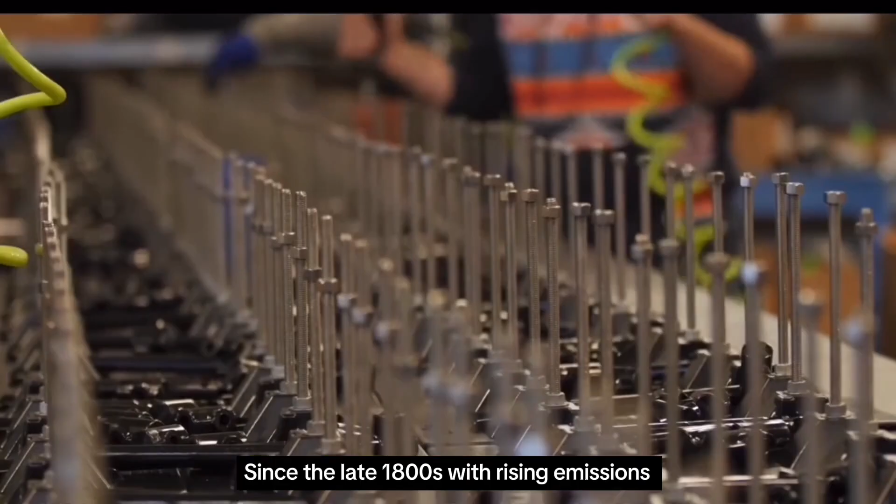To cap global warming at 1.5 degrees Celsius as per the Paris Agreement, we must cut emissions by 45% by 2030 and achieve net zero by 2050 by shifting to renewable energy like wind and solar. But consider this. What if these renewable sources, as I mentioned lately, also include noises?

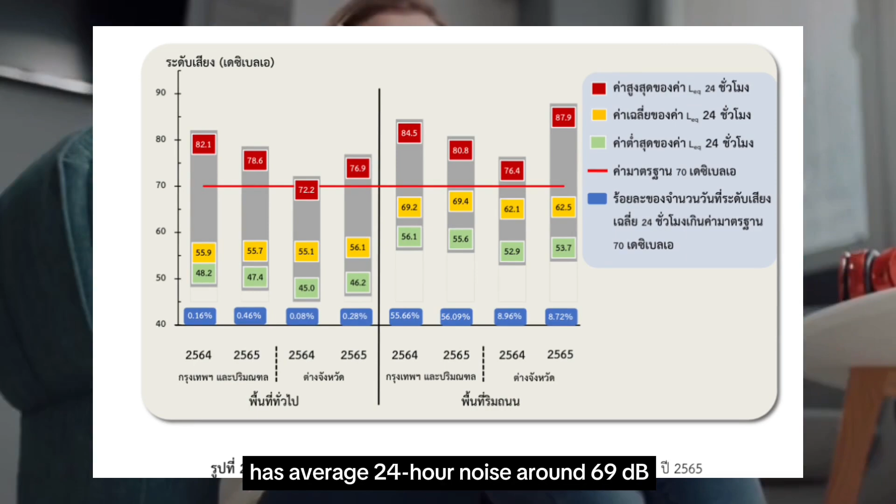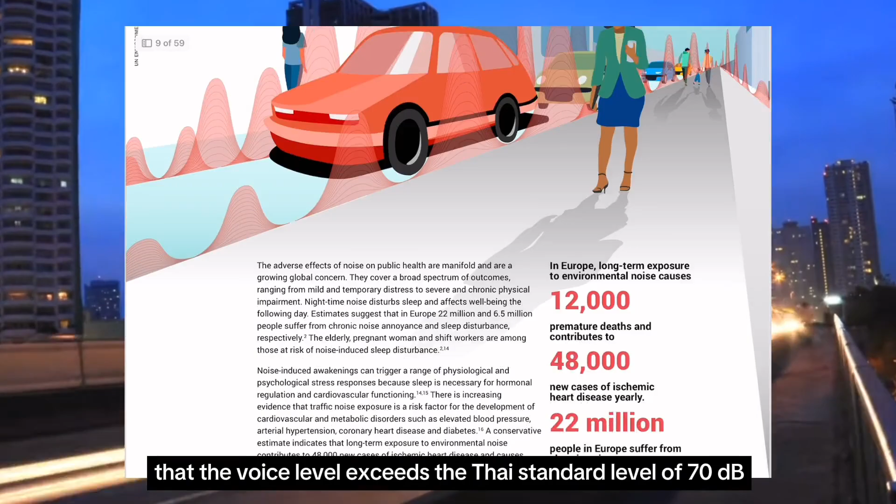From the 2022 noise pollution report issued by the Pollution Control Department of Thailand, in 2021 and 2022, the street areas in Bangkok and metropolitan areas averaged 24-hour noise around 69 decibels. In both years, on 56% of the measured days the noise level exceeded the Thai standard level of 70 decibels. So, are there any ways to solve these problems?

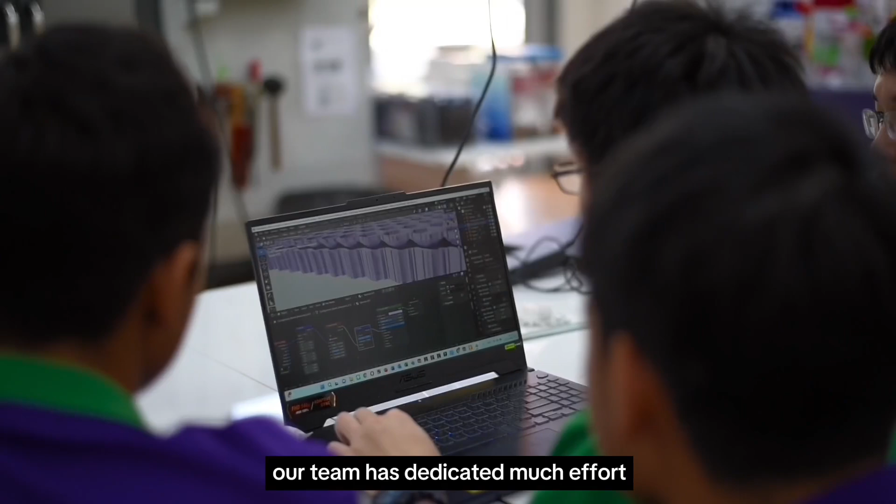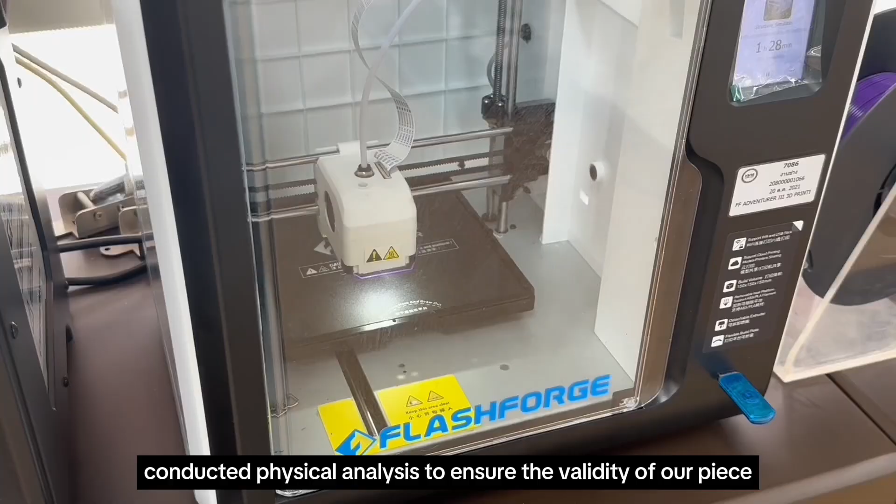Is the only possible way just to use the normal acoustic pad? No. Why don't we convert the noise pollution into clean and usable energy? During the past 2 months, our team has dedicated much effort to turn this idea into reality. We created the design, performed theoretical simulations, and conducted physical analysis to ensure the validity of our piece. Hence, we are proud to present to you.

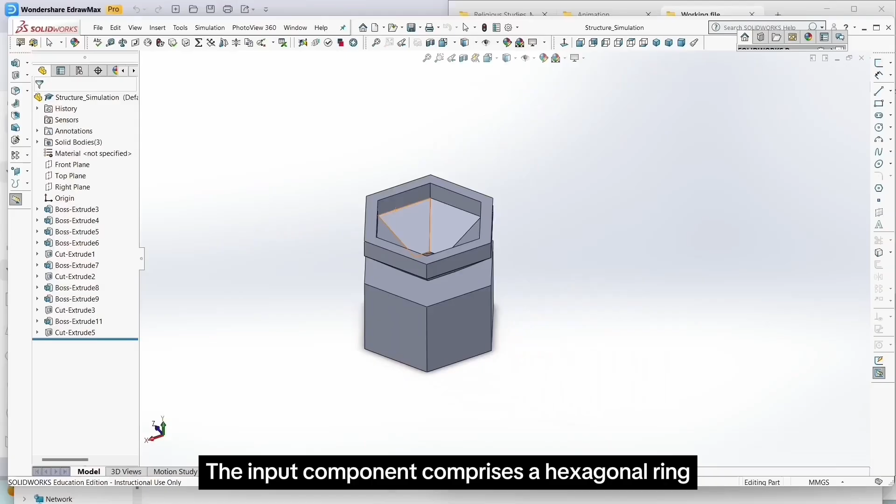The structure can be divided into 4 major parts: the sound input component, the sound amplification component, the electricity generation component, and the electricity storage component. The input component comprises a hexagonal ring aiming toward the central pit to focus as much input sound into the cavity as possible. An interlocking structure around the edge allows a simple assembly between each unit.

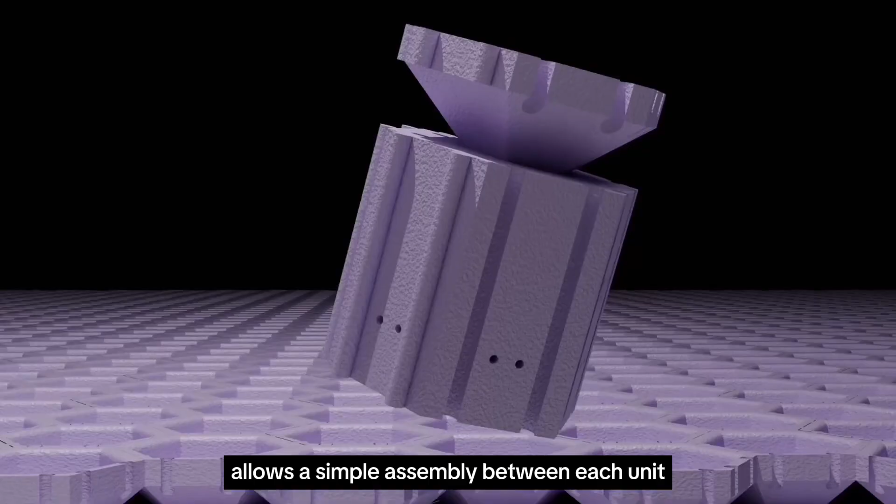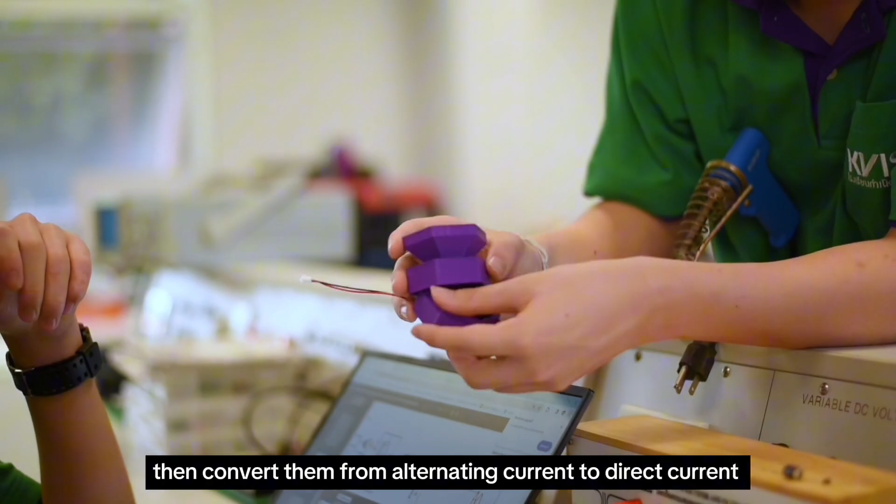The amplification component comprises a cavity that acts as the resonator, and its dimensions are calculated to match the incoming sound frequency as much as possible to maximize the amplification. The electricity storage component combines the produced energy of each unit, then converts it from alternating current into direct current and stores it in a capacitor or battery of choice, ready to be used.

In determining the efficiency of the design, we have simulated 2 things: the amplification efficiency of our design and the electricity generated. We do this with ANSYS Student, and we plot and probe our results from our system, and we consider the amplification factor, the initial velocity, and the electricity generated over the range of 200 to 2000 Hz, which is the common range found in our everyday lives.

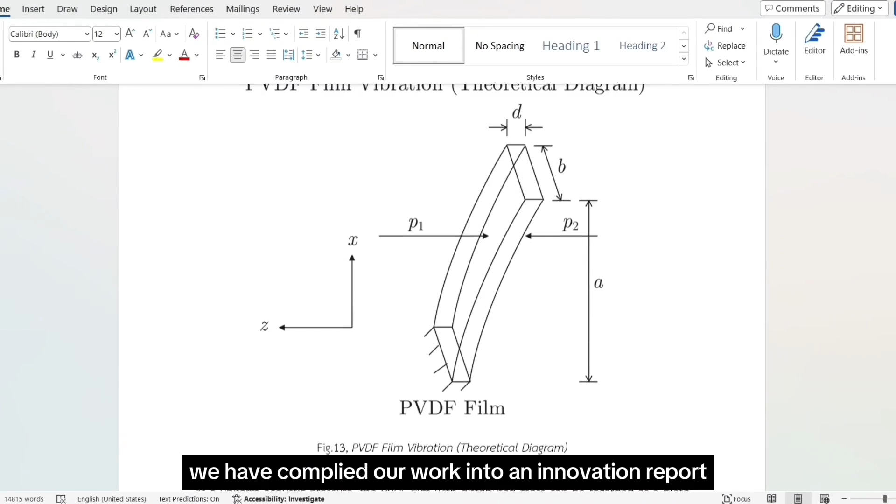We perform the physical experiment to validate the simulation results using various laboratory items such as oscilloscopes and sound level meters. We also build circuits for the storage component, such as rectifying circuits, and 3D printed models to experiment with the interlocking details. To allow everyone to visualize our work easily, we have compiled our work into an innovation report, spanning over 100 pages to ensure the clear and systematic presentation of all our hard work.

Our customers will be factories, especially the loud ones, as the values of our product: noise reduction, cost subtraction, revenue addition, reputation, and others match them best. 3 keywords that define our brand are premium, futuristic, and environmentally friendly. Unlike other brands, Ecoustica will not only reduce noise like a normal acoustic pad, but also uniquely generate electricity from it.

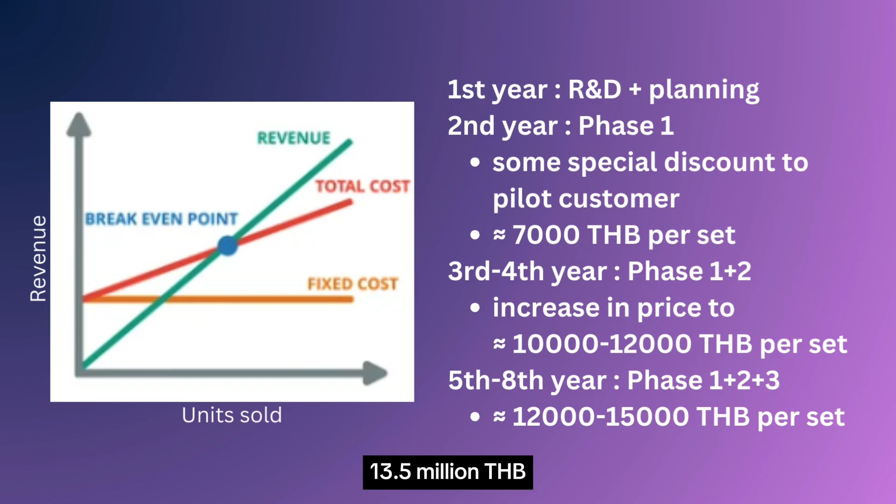We divided our strategy into 3 phases by type of customer, including PTT group to increase credibility, listed companies, since we can increase their ESG rating, and general factories to expand our customer range. It costs around 8,000 baht to deliver a complete set of Ecoustica units, while the price of our product will depend on the phases. From the break-even point analysis, we break even in the 3rd year with a net profit of 13.5 million baht with continuous growth.